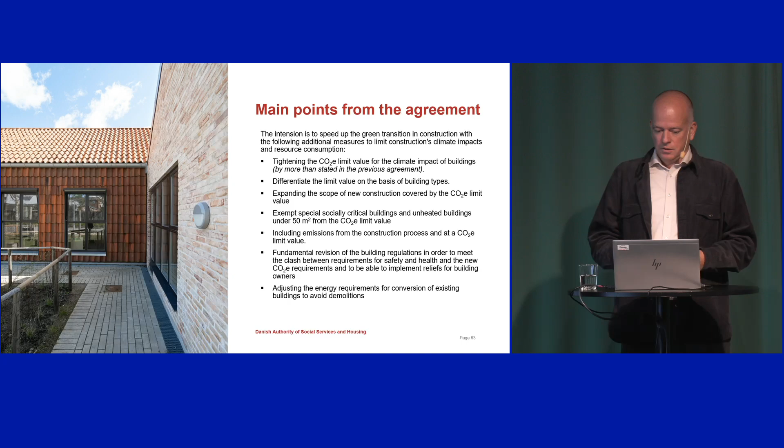So I'm just going to go through them quite fast. For each of these levels, we have introduced a new limit value, or are introducing new limit value. The original one in the building regulations now is at 12 kilograms CO2 equivalent per square meter per year. So when we introduce an average limit value at 7.1, it's quite ambitious - it's quite a big step down.

We also have indications that this means that about 85% of all the buildings erected before the limit values was introduced would have problems living up to this limit value. Or in other words, 85% needs to do something else to live up to the requirements. Only 15% have done calculations or climate declarations that was below the limit value.

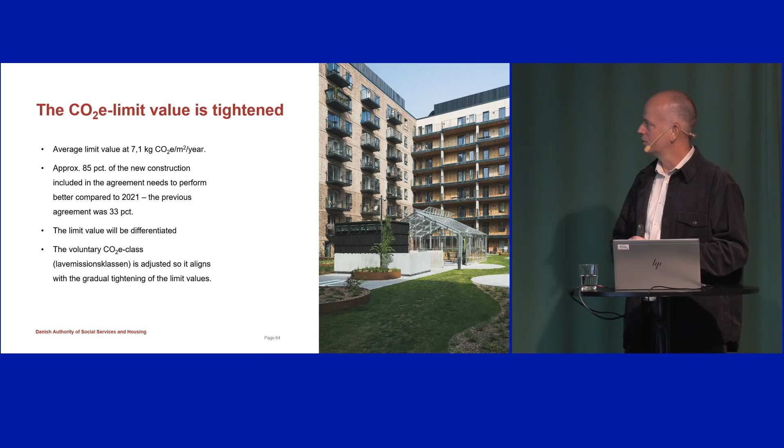And we also have a low emission class that is a way of making the building industry build to a more ambitious level than what we have indicated. We have adjusted that as well, because now the limit values go very close down to the low emission class.

So when we say that more new construction is covered by the LCA requirement, it means that at the moment we only have buildings covered by the EPC, where they have to make an energy label, but that only accounts for about 57% of all new construction in Denmark - that's at least our data.

So we expand that. We include holiday homes, summer houses. We include some of the unheated buildings like parking buildings, storage buildings, unheated storage buildings, but not the unheated buildings below 50 square meters. We also include extensions to buildings - that has not been included at the moment.

So if you have an extension to an apartment building, or to an office building, institution, stuff like that, then you will be in this requirement - you have to fulfill this requirement.

We also have this requirement for extensions to single-family houses, terraced houses, stuff like that, but only for very large extensions.

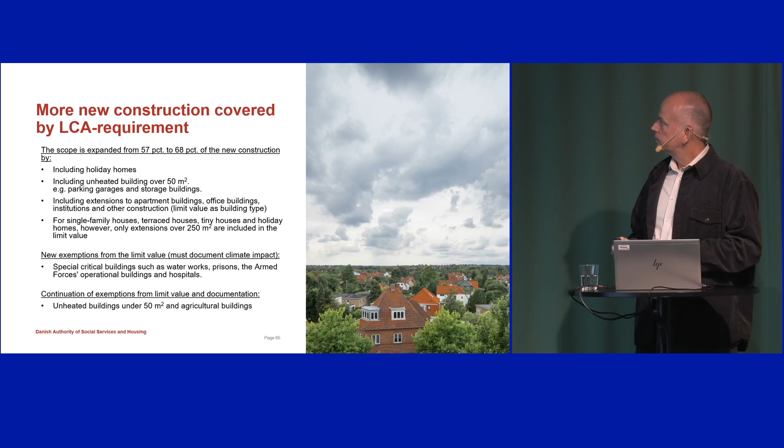And we also expand the scope to the building process. So we include the construction process in the limit value. We introduced that by having the A4, A5 module in the requirements, which we didn't have before.

We have some indications that if we set the limit value for the construction process at 1.5, it corresponds roughly to that half of the building sites need to perform better.

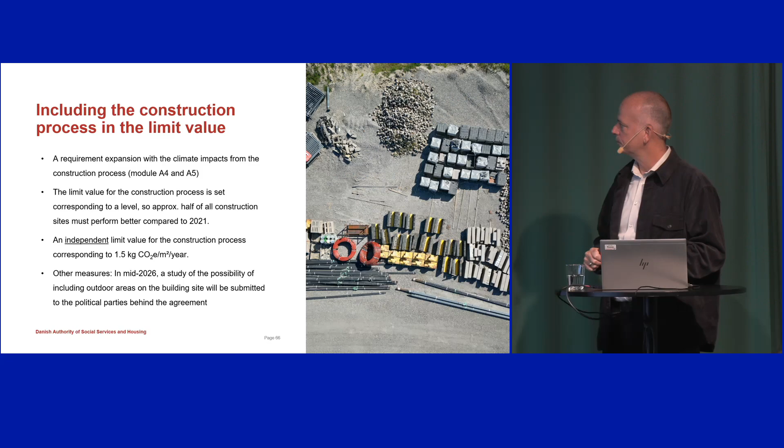I think it's important to say that this is an independent limit value. So you have to fulfill the limit value for the building process at 1.5, but you also have to live up to the limit value for the building itself, and you cannot borrow from one to the other. You need to fulfill both of them.

We believe this will lead to a change in the way that we build. It must happen that way. We have 85% of the buildings erected in the past that would be above the limit value, so there has to be some sort of change to how we build.

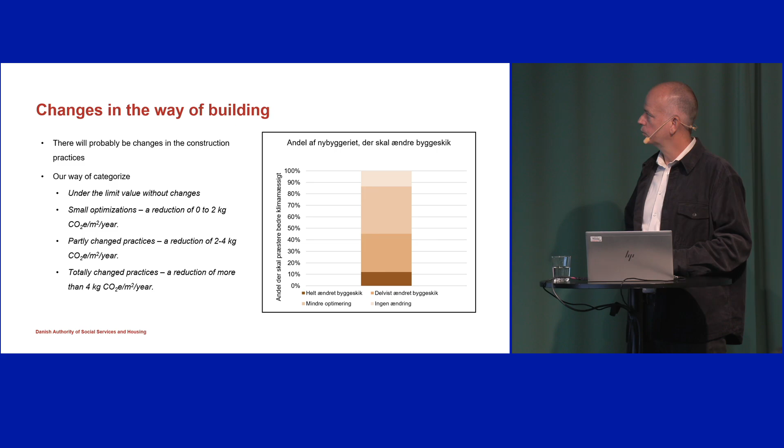Maybe 45% have to actually change something in how they build. Maybe the ones that are smaller optimizations can actually just tweak it by finding the right brick or choosing another flooring or whatever. But this is quite important to know.

So this is the idea for what we are going to do on the revision of the building regulations - that we have to look at the whole circle. We need to look at the technical requirement for safety, for health, for energy consumption, and see if there's a clash between that - something we need to adjust to be able to facilitate that the climate regulations could proceed.

We also have to look at the technical requirements for renovation, in order to make sure that it's actually possible to adapt a building, or to fulfill the requirements, or change how a building is used, to be able to use the existing building stock in a better way.

And this is some of the most important parts in this. There's also, of course, use of digital processes and tools - that's really important to facilitate as well.

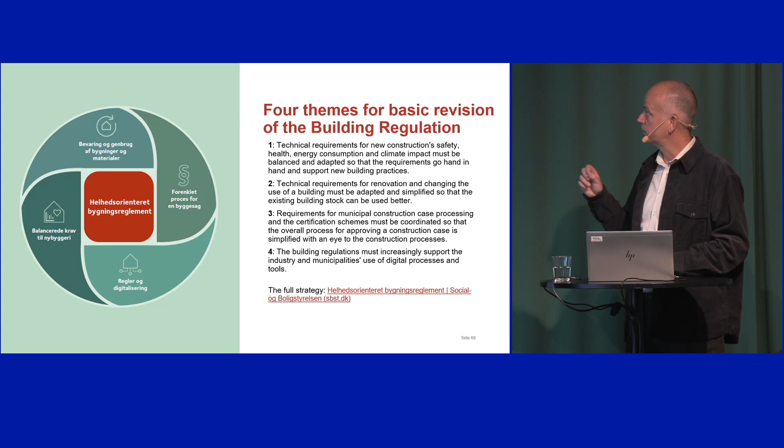Just to have a little bit of talk about what we learned when we introduced limit values in Denmark, and what we found necessary to do to be able to apply this requirement in the Danish building code.

First of all, the standard that we used is really, really good, but it has never been written in a way that it was supposed to be national requirements. This was a standard written to be used if you want to do an LCA requirement in some way, or an LCA calculation - you want to show you have a product or a building that...

...leads out that much emissions, but it has never been written in a way that it should be a foundation for a national requirement in building code.

So you need to kind of tweak it, or make simplifications, or make more precise descriptions of what you do in the individual modules. So when we look at our requirement now, we found that we had quite a lot of clarifications that we needed to do. For instance, which stages should we include, and which modules do we include?

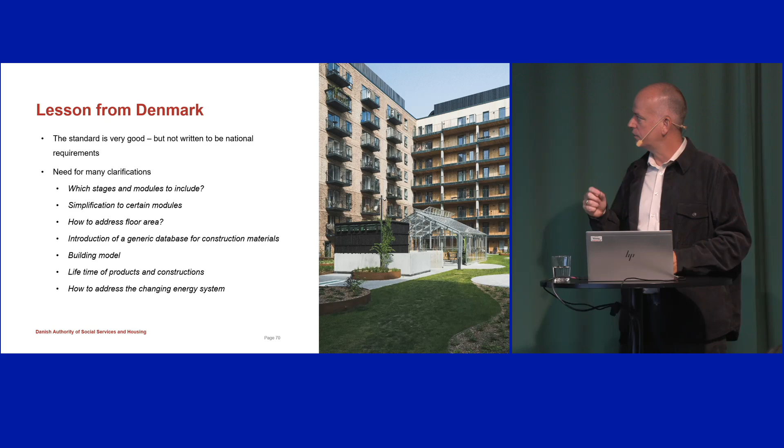We have 750 lines of a building model - I need to speed up a little bit. You also need to have a list of how the lifetimes of products and constructions are, and you also need to address the changing energy systems.

Just one slide more. When you set the limit values, it's really important that you know the data behind what is being built. You need cases or data at least to show what is actually being built. You need some cases that are representative, and you need to collect that data.

And when you do that, we showed at least that there was differentiation between building types. So for single-family houses, you have one level, and it's easier to fulfill. So if you want an equally difficult limit value, you need to differentiate between them.

We also need to address how to handle mixed-use buildings, at least if you have differentiated CO2 requirements. And then, just one last point, you need to address special buildings. There are certain buildings that, to fulfill their function or purpose, need to use certain constructions, and they will emit CO2.

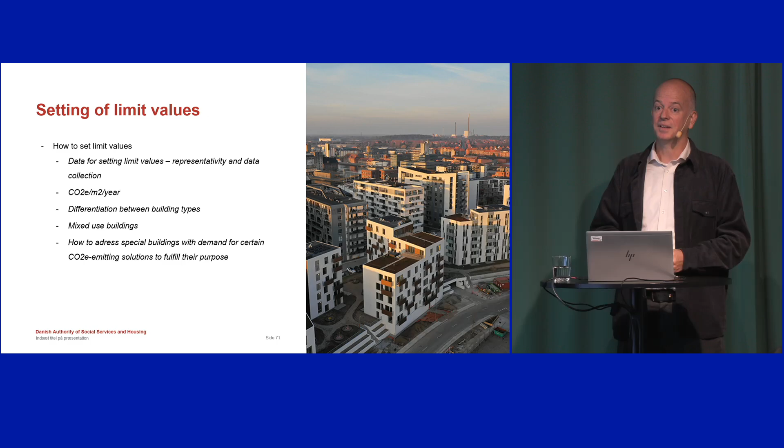So you can, for instance, think of a concert hall. You need to have a very large room that maybe gives some limitations on how to build. Yeah, that's it. Thank you.

Thank you very much, Niels. Do we have any questions here? One question, and the microphone, please. Where do we have the microphone? No, please - it's for the online, I think.

Okay, thanks. In my opinion, there is one building type missing in the targets - meaning logistics buildings. How is your thinking around that? It's many square meters, we develop a lot of logistics, but it's not covered in the targets.

Well, we simplified the lines. Actually, it's in the office buildings - I think storage buildings is in that as well. So logistics buildings will be there.

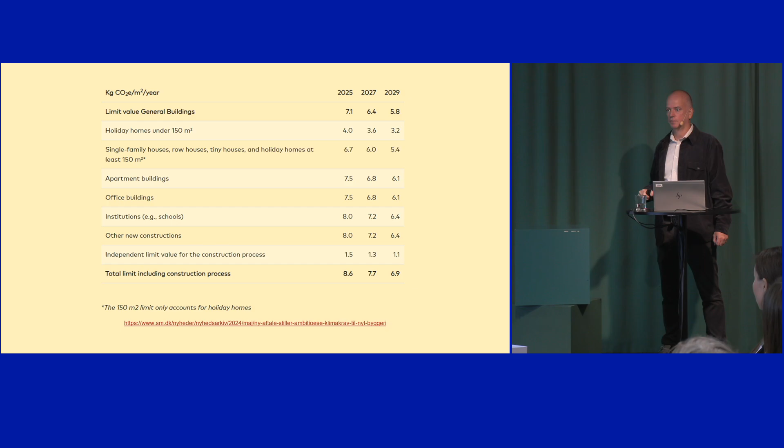We will, when we do the regulations in Denmark, be more precise on where the different types of buildings go into the categories. Okay, because it's possible to go much lower on logistics. Probably, yeah - we still have a lot to learn, I would say.

Maria from Finland: A couple of years ago you did a roadmap for the limiting values. Are you aligned with that roadmap with your new limiting values? No, we are way below that. Thank you.

The original limit value identified in the roadmap was 10.5, and then we tweaked some of the background data. So if we would have followed the same line or the same roadmap, it should have been 9.9, and now it's 7.1. So we're quite a lot below that.

Peter Vangsbo from Arup: What is the projection for infrastructure projects, station buildings? Yeah, I don't know. It's not - it's another department or another ministry, so I can't answer that.

Okay, I think we need to proceed, and we can have more discussions after lunch. So thank you very much, Niels, for this presentation. And we will now have a presentation from Ingunn Marton about the regulation in Norway. Thank you.

My name is Ingunn, and I'm from the Norwegian Building Authority, and I will talk about experience from decided and coming climate regulation in Norway.

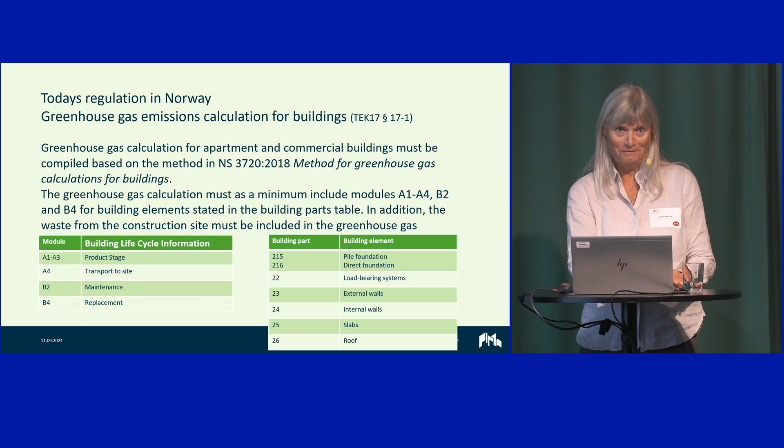Also, we are not collecting these calculations. They can be shown if we ask for supervision. So, sorry to say, we don't have that much experience to tell you still, but we will. I'll tell you more about what we are working with.

We have been working with a climate partnership, and this report, the knowledge base for the construction industry, was launched in June this year. The partners are now discussing the content in the partnership, and I think they will tell us more about this in late September. It's the government by the Minister of Local Government and Regional Development, and the NHO, the Federation of Norwegian Construction Industries, and Fellesforbundet, the United Federation of Trade Unions, that are discussing this. So we are waiting very much to see what this climate partnership will be.

I'll show you something about what's in this knowledge base. First of all, we try to find when the gas emissions are coming, and who is deciding the greenhouse gas emissions, and who is involved.

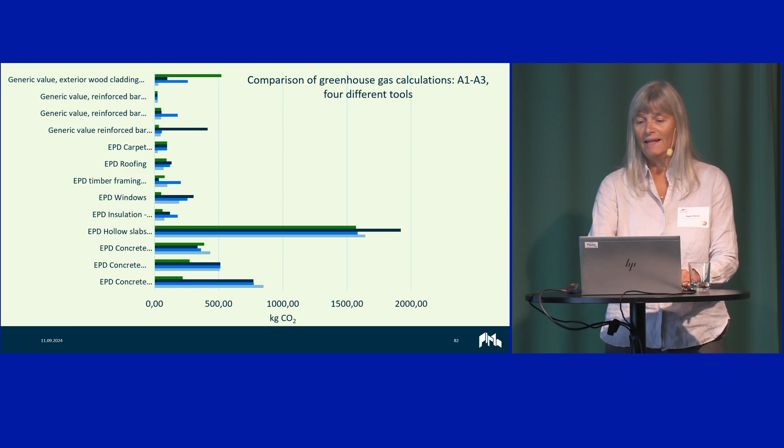The construction industry is also looking into this standard. They are developing a guide, and we are working with them on this - on how to calculate maintenance intervals and technical lifetimes, transport distances, vehicles and load factors, energy, construction site, waste amounts, construction equipment, and end of life. This will also help us with the LCA tools becoming more harmonized, but it's not enough on its own - I'm pretty sure about that.

So we are going on. I think we're going to get some limit values someday, but we have to get this in place first. So that was what I wanted to say.

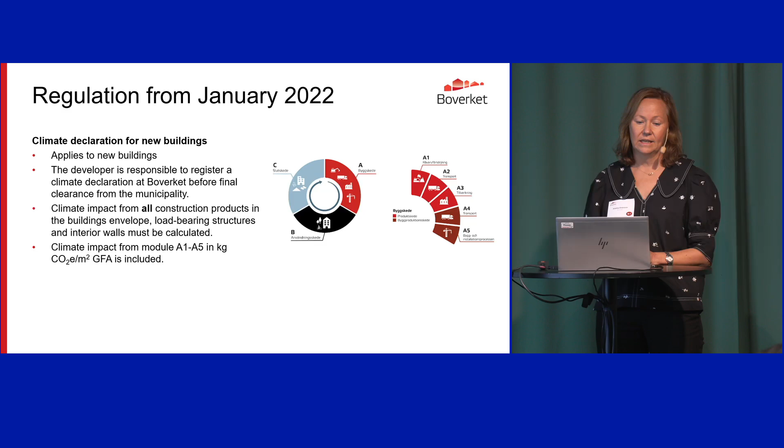So I will talk about the experiences from the decided regulation in Sweden. We have had this regulation in place since January 22, and it applies to new buildings. It is the developer who is responsible to register a climate declaration at Boverket, the national authority, before they can get final clearance from the municipality, meaning they need to declare as-built the climate impact. They need to declare the climate impact from all construction products in the building's envelope, load-bearing structures, and interior walls. The regulation is limited to modules A1 to A5, and they need to declare it in kilograms carbon dioxide equivalents per gross floor area. So this is the introduction of this new regulation in Sweden from '22.

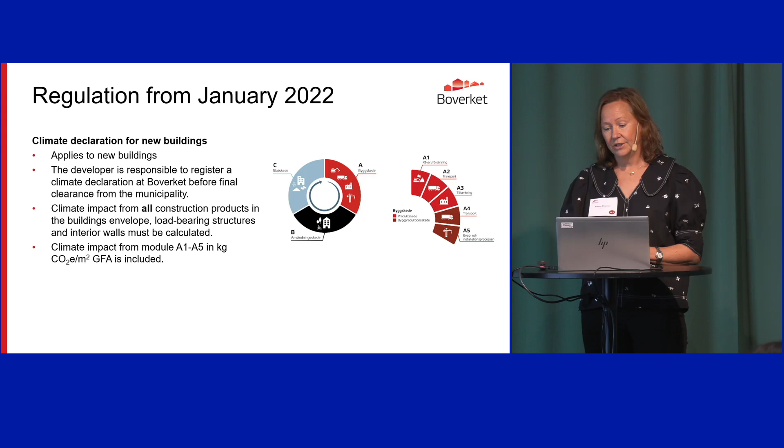As you see, it's not the full life cycle, it's not the full building, but the starting point was to start a learning process in the construction sector, to start calculating as a first step. And still, this is a limitation. We think it is limited to the parts that have the greatest climate impact, in the Swedish context, as you see in the figure on the side. So in this way, we thought this is an introduction of rules that are reasonable. We know it takes a lot of time to collect data, so to make it easier, particularly for small and medium-sized enterprises, but also to get good quality on the calculations, we said the state is responsible to keep an updated generic climate database.

From the beginning, it was said that this regulation should be able to build on with limit values later. Of course, we got a lot of comments from the Swedish industry, so it was quite important to give a roadmap on what is the next step of this regulation. We had a governmental assignment on this, and in 2020 we gave this roadmap to the government, and this was sent for consultation. I think that, together with the first regulation and the roadmap on the next step, this was quite well accepted in the Swedish industry. We also got the governmental assignment to give a legal proposal on limit values, and the report was given to the government last year in May. So with this as a background, I would say it's been quite well received with this roadmap and legal proposal.

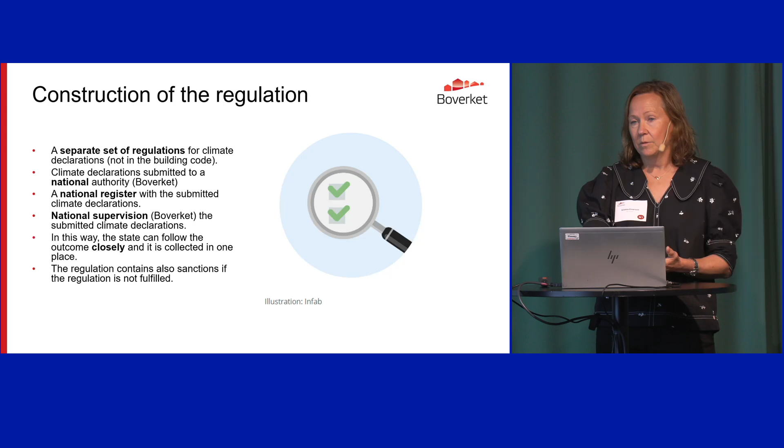With this new regulation, there were a lot of questions from the industry. I think that's something that worked well - we had a communication strategy for three years on how to introduce this complex task, LCA words, to the construction sector.

So we have this digital handbook where we have all the guidance on application of the regulation. It's not a cookbook on exactly how to make calculations, but we need to be clear what is included and what is not included. We have everything gathered in this place, easy to find, even though sometimes we got comments about where this handbook is, since it's digital and you don't print it.

We have the database, the IT service for registration of the climate declaration, and all the frequent questions and answers we also put in this. This is much used and appreciated, and we get a lot of comments - people saying they don't understand how we mean, and so on. We try to keep this updated and spend quite a lot of time on it, with illustrations and easy explanations, not too much. I would say this is something that has really worked well.

Another one is this climate database from Boverket. I think that has also worked very well. This database has generic data - if they use that, it must come from this database. Today we have more than 200 resources for construction products, but also for energy and fuel. We have some conservative values for the construction products, and the main reason is that you should not benefit if you use generic data - it is those products on the market with, say, the highest climate impact.

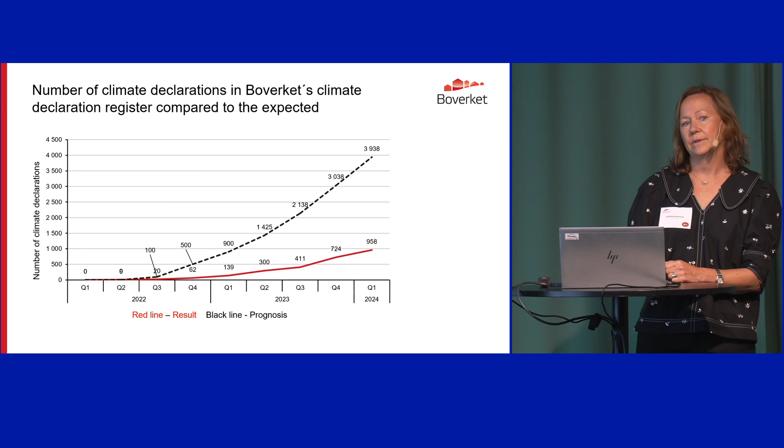Here is some statistics from our register. When we started building this up and planning for our supervision, we expected that we would already have 4,000 declarations. But as you can see in the red line, those are the declarations we have received so far. We think there were quite a few who sent in building permits before this legislation came into place. But also, according to the crisis in the construction sector, there's a decrease in construction projects, and it takes quite a long time to build. So these were projects that applied for building permits in January 2022, and they're not yet constructed.